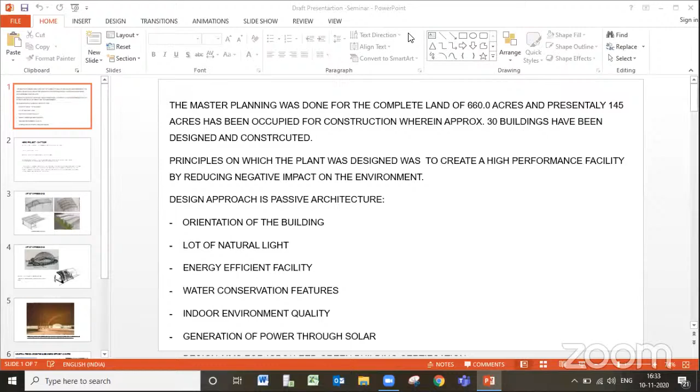Good afternoon to everyone. Are you able to hear me? Yes, Mr. Dwivedi, good afternoon. Should I start? Yes, please. Are you able to see my screen? Not yet. My screen is visible or? No, sir. No. Okay. Screen. 1 minute. Yeah. It is visible now? Yeah, it's visible now, sir. Okay. Thank you.

Good afternoon to everyone again. I am R.S. Dwivedi from PC Design. They have already introduced me. We have designed the project for Hero Motocorp Limited at Chittoor in Andhra Pradesh.

The master planning was done for the complete land of 660 acres. They are having 660 acre land, and presently they have occupied 145 acres in which various buildings have been designed. The main buildings are the assembly plant, the paint shop, the frame assembly hall building, and the dispatch area. These are the bigger buildings.

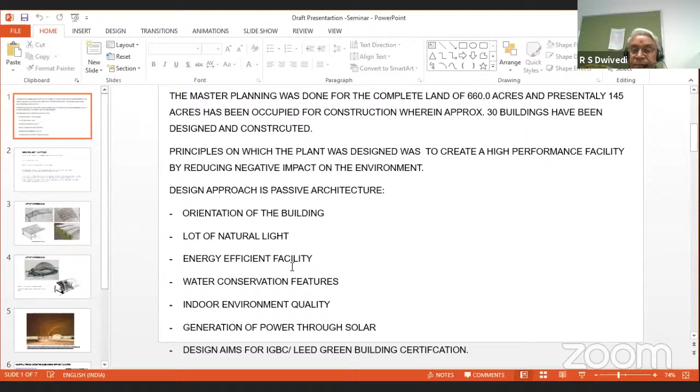The key feature is it is a PEB building. The building is designed in two heights. Each bay of 15 meters has a 10 meter height, and another 15 meter bay has a 12 meter height. We have provided north light glazing to get natural light from the north side. Glazing is provided on both sides. I'm sharing a small sketch for that — this kind of assembly plant is there.

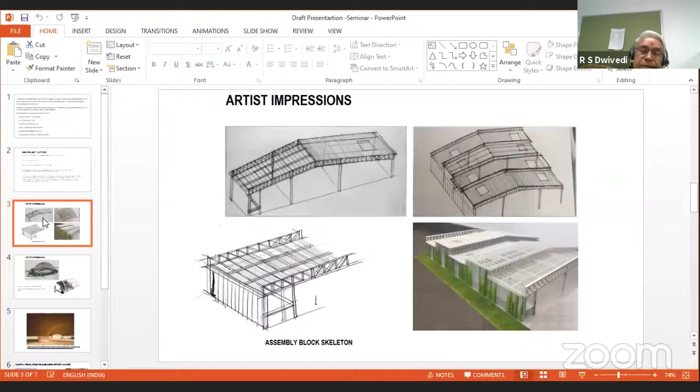The orientation provides sufficient natural light to the interior space, so there's no requirement of switching on lights in daytime. The structure is planned with a grid, both low bay and high bay, as I have explained. It was basically planned to install glass on the high bay north side for natural light, and solar film on the south side.

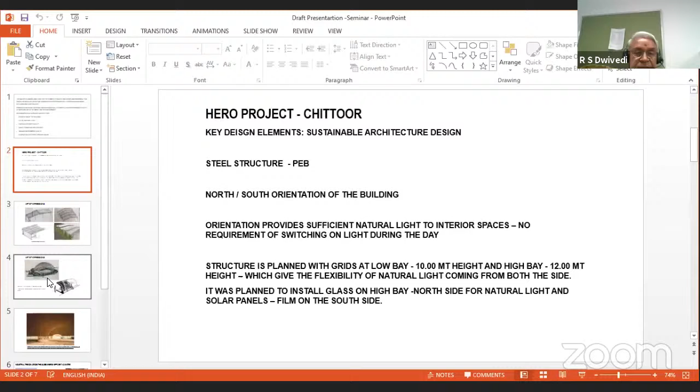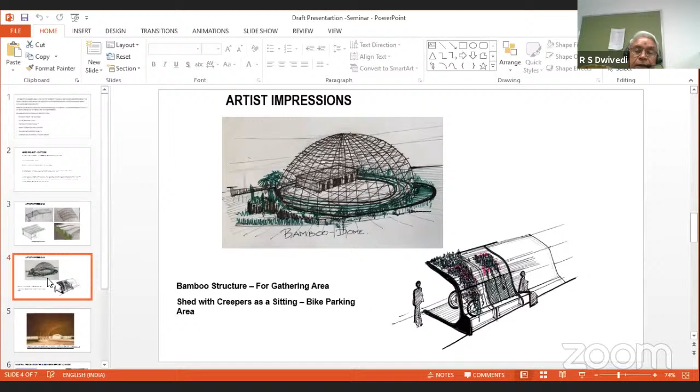We have planned a bamboo structure. It's a bamboo dome having 25-meter height. It was created just for get-togethers and for any large convention, public training purpose. The structure will be like this.

Presently, it is not completed, but it will look like this. The plant will be totally air conditioned. We will be installing it, but presently it is not installed. It is planned and it is in the design scheme. There will be Big Foot units. The unit is basically shown like this. It will appear like this in the photograph.

It is a ductless air conditioning system for large footprints. There won't be any ducting, I will show you again. You see, maybe see the cursor. Only a chute will be inside the plant. There won't be any ducting. It will blast the air.

Moreover, this size of plant is 467 meter by 72 meter. There we have planned 4 units for this much size in the assembly unit.

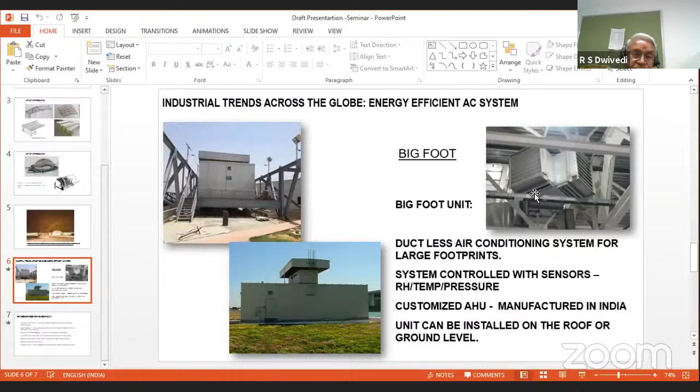Apart from the Big Foot unit, we have planned the baffle walls for acoustic purpose. There are visual protection films in the display area in the office building. Indoor greenery we have planned in terms of green wall, outside also, inside also. Grass screen pavers are provided in the parking area to create the environmental paving system.

We have done the road, bituminous road with the waste plastic, keeping in mind the environment and green building system.

Basically, in any architecture, we always feel that we should use the best material in the project, which gives us more of the design and aesthetic flexibility. We have used the metal sheeting of maybe Tata BlueScope. It's a Colorbond roofs and walls sheeting.

We are using the Tata BlueScope sheet in our various buildings also. It is used in conventional steel buildings, and it is used in PEB buildings also. In various warehouses, it is in the design also, and it is in execution also.

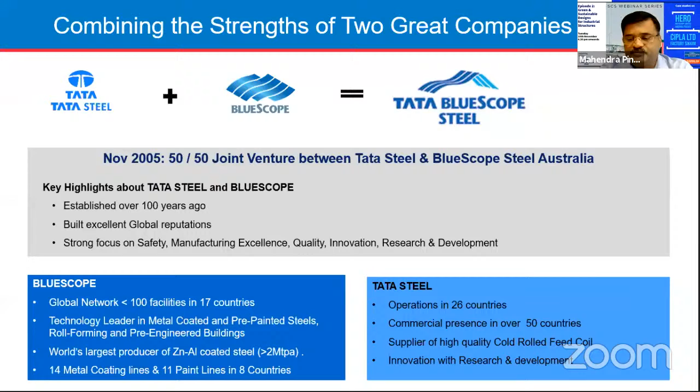And development. Now they are talking about sustainability for the buildings. As you know, steel has been used mostly in engineering and construction as a material because it is very strong, durable, flexible, reusable, and most easily a recyclable material.

If you see, the steel recovery rate from construction is around 85%. And if we are doing the recycling, then you can save millions of tons of carbon dioxide. So this is about the life cycle segmentation I'm talking about, because of the steel's durability and recyclability.

So it goes to the construction phase. If you can fabricate, or do prefabrication or PEB manufacturing, which helps reduce the lead time and whatever construction nuisance normally happens at the construction site because of fabrications, weldings, cuttings, and all these things.

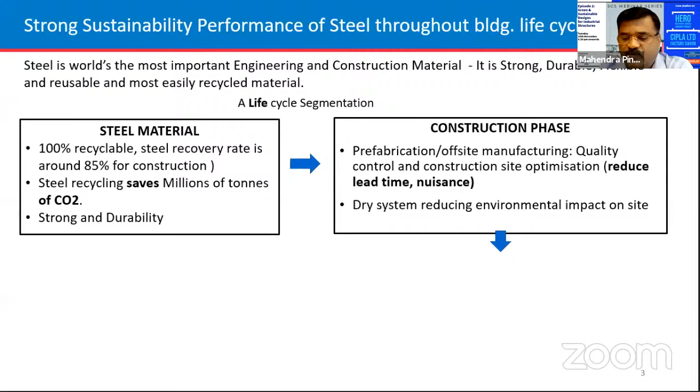This is not required nowadays because PEB buildings have been designed and fabricated at the factory and shipped as, we can say, a full kit solution to the site where it can be assembled and ready to use. So it's mostly a dry system construction and it is fully environmental friendly. We are not using natural resources when we are building the factory.

So in case of designing or the life cycle of buildings, the weight reduction of structure is normally very important, where we can save steel wherever there is a requirement of loads, where you can design with the steel structure. Steel has excellent longer spanning capability.

So you can have the columnless structure. Sometimes we can span, say, 100-meter spans wherever required, because airports and aircraft hangars require a clear span of 100 meters plus. Steel is the only solution for that.

So if you want to have extension of the buildings, extension is possible in case of PEB buildings or any conventional steel buildings without disturbing anything, and it can be built very fast.

If we're talking about organic color coated steel, there's a pre-painted steel. Nowadays, the paint system is developed, which gives more reflectivity, so you can get more comfort inside the building for who is working under the roof.

So that talks about sustainability. And if you talk about end of life, you can dismantle it, reuse it, or recycle it again. That's the benefit of steel. The overall life cycle cost of steel is very low compared to RCC structures or other non-conventional structure types.

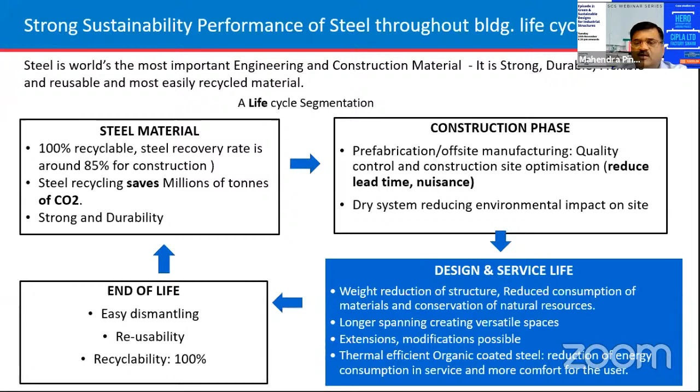Nowadays architects want to build nice, sustainable architectural buildings, so the steel has to take that type of structure and shape. So we manufacture the color coated steel, that is Colorbond steel.

And when it's going for various further operations, whenever there is cutting, bending, crimping, or any type of shaping like roll forming, the paint film should not crack. So it gives stability and perfectness for your structures.

We have a range of colors, so you can choose any color. Again, it gives thermally efficient buildings. So it's the best choice for architects to use color coated steel for building applications.

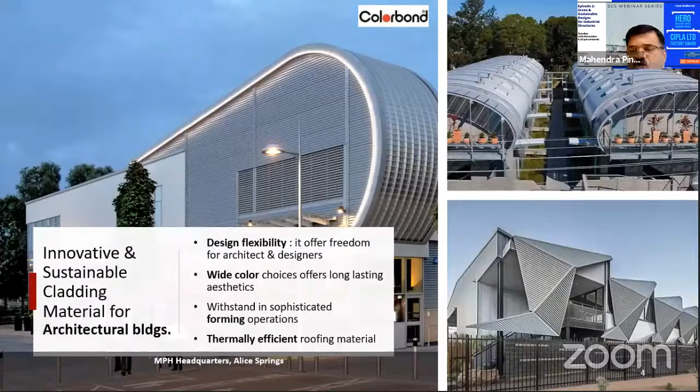These are some photographs built in Australia. I'm sharing this with you because the architecture is very nicely done for institutional buildings or shopping malls type of things. It's not limited to small buildings, it also goes for large industries.

So industries should consider extreme weather conditions. The material should withstand extreme weather conditions.

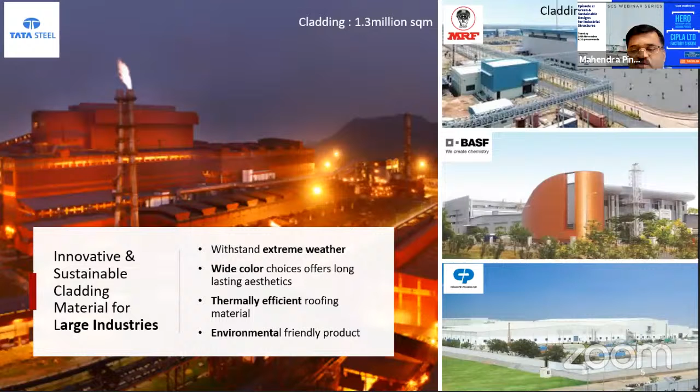Or very close to the coast, or in extreme weather, the steel has to withstand, and Colorbond steel is an option for that. It's also used in logistics parks where the structure is built with curved structures or double slope structures with various combinations and logo properties.

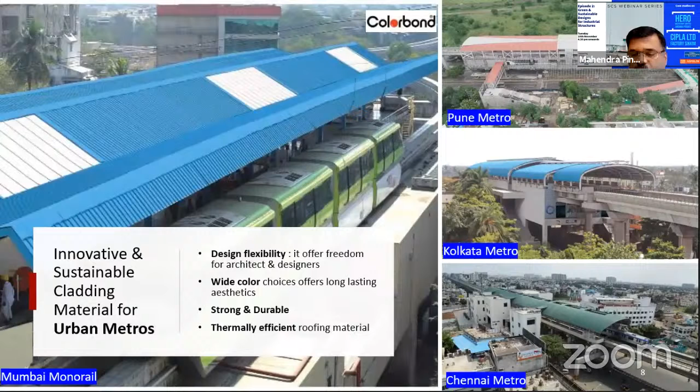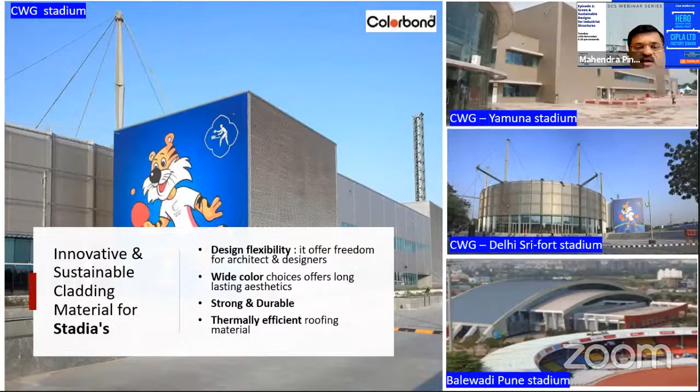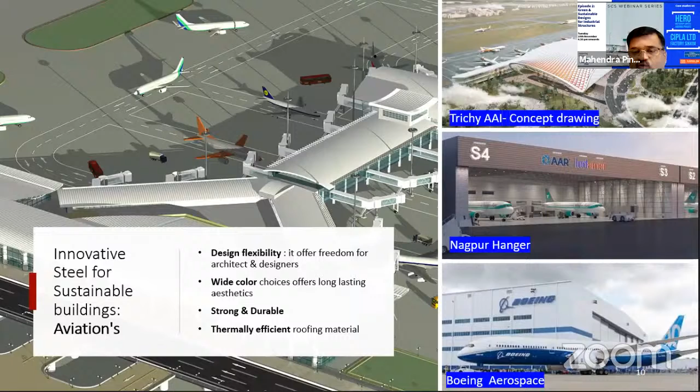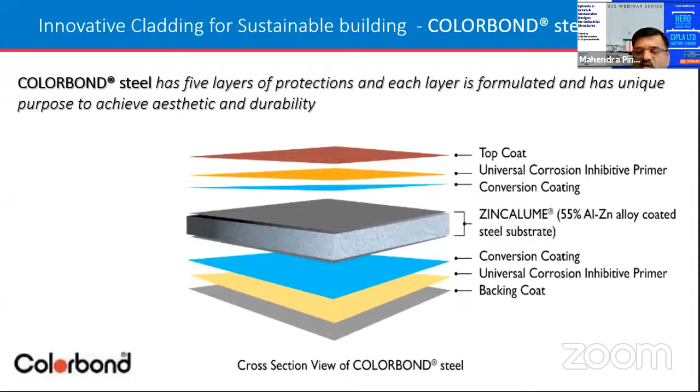So what goes behind making Colorbond steel? Colorbond steel has a zinc-aluminum coated steel as a substrate, and it has been made at the factory, with 5 layers of protection, which gives durability, aesthetic quality, and sustainability for the buildings throughout the life of the building structure.

So the manufacturing process of ours is again sustainable. Whatever we manufacture at the factory, the surface treatment sections, solvent emissions, absence of harmful substances in the paint system - we are complying to that. And that's why we got the accreditation of ISO 14001 for environmental management system standard.

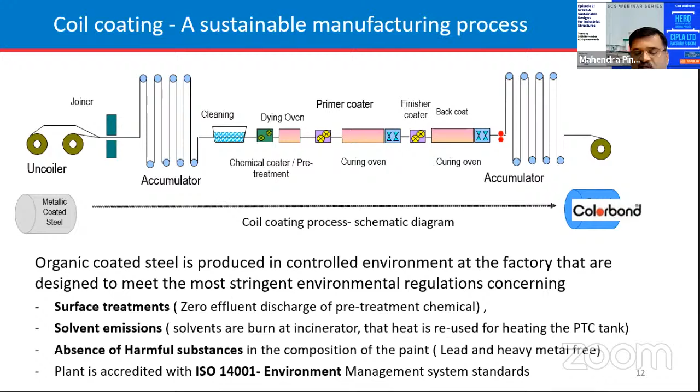So this sustainability is also extended to the manufacturing process as well as site fabrications. What are the ranges? We offer different types of products - Colorbond steel, XRW steel for general applications where there are no harmful gases, or factories located at type 3, type C1, C2, or C3 type of environment.

And Colorbond steel has Thermatech technology, which gives more reflectivity. With Thermatech technology, you've heard the name SRI value. Nowadays green building talks about higher SRI value products for cladding material. So Colorbond steel has an SRI value of more than 78 for some lighter colors.

Also, if you go with an SRI value of say 30 or 40, the building slope has to be designed in such a way that it has to be more than 10 degree slope. Lower than 10 degree slope, then you have to use a higher SRI value product.

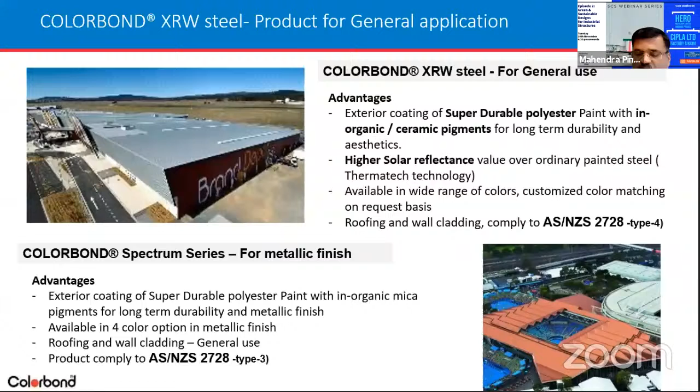So somebody is looking for a metallic finish - we also offer that for buildings, where you can get a metallic luster. In the morning you will see different colors, and at sunset you will see a different color. On any particular day, the building is going to give a different look altogether, and it is complying with type 3, type 4 categories as per ISO standard or Australian standard.

It's not limited to that - if somebody is looking for projects very near to the coast, say 100 meters, or within heavy industrial areas, where within 5 meters or 2 meters distance there is another factory emitting chemical fumes, gaseous vapors - even if the building you are making for an assembly unit is not emitting any fumes during manufacturing, nearby companies might be. So your roof has to withstand that type of atmospheric condition.

So Colorbond Ultra is the product which gives more life - I would say it's 1.5 times more than Colorbond XRW, and it's going to give more life for your building, which is located near the coast or in an industrial environment.

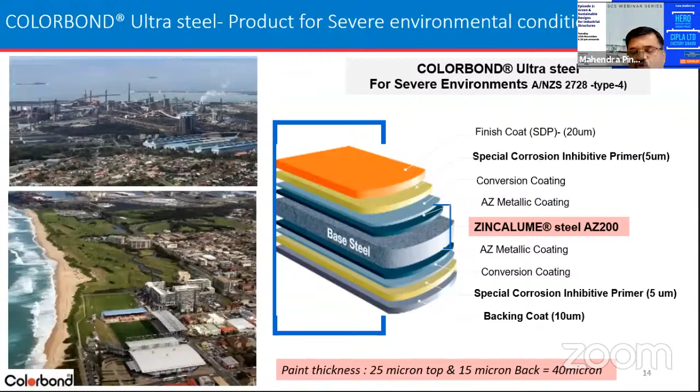So what is the assurance? If somebody asks, are you justifying that this is going to perform? We are not limiting to accelerated lab tests - we also go for real life outdoor tests to assure the quality of product, because we are offering the product, but what is going to happen in 10 years? So we are assuring 10 years performance or 20 years performance based on our experience, because this product has been tested and proven for more than about 60 years now. So we know that - so what does the test normally do?

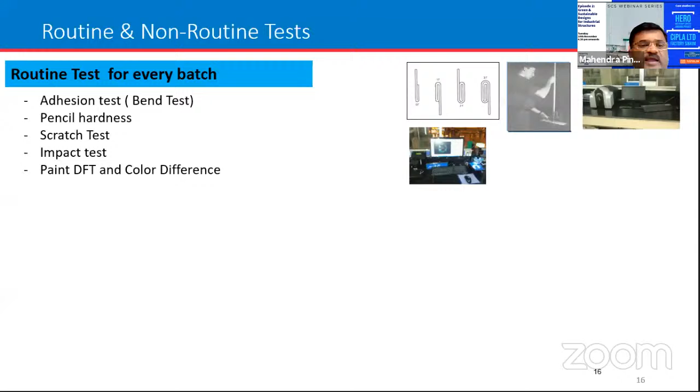The routine test, where normally the product is going to have further operation like bending or curving. We measure that bend test, or there is pencil hardness, the scratch test, impact test, or if somebody is doing hammering, what is going to happen on the color coated steel. And we also measure whether the paint DFT is right or not, what is the color, whether you are asking for something and where I'm supplying something, it has to match without differentiating to the naked eye. So that is what color difference is being measured.

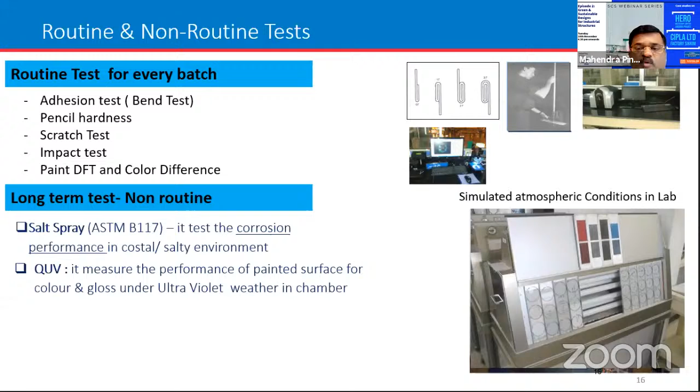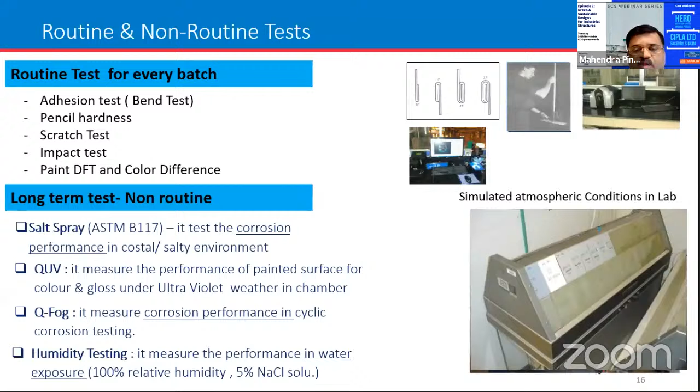Then long-term tests, which are laboratory simulated tests: the salt spray test, QUV test, where ultraviolet rays are measured to see what is going to perform under ultraviolet rays. A Q-fog test, which is a cyclic test, where cyclic corrosion is simulated because we are replicating the condition in coastal or industrial zones, and humidity where factories are located in Mumbai or similar coastal, humid regions. So we are measuring the performance of the product, and it's not limited to that.

There's also the outdoor exposure test. BlueScope Steel is doing the test, and we are also doing it in India. We have done the test for outdoor exposure at various locations, and we have 2 sites currently operational. So if the factory is very close to the coast, we treat it as a C4 type of category, and we measure the performance.

We create the formulations, we keep the samples for whatever new product we want to introduce, or what is the performance of the competitors, what is the performance of our material, what colors we are going to introduce in the near future, what different innovations we are going to do. Everything is done there. It's just like a laboratory, our outdoor exposure laboratory.

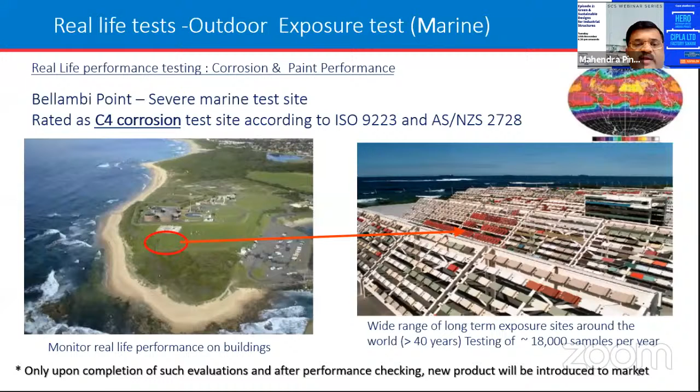So if I want to introduce a new product, we do the test prior to that, say 5 years prior to the product launch, and we keep 15 to 20 formulations, and then we select which formulation is going to withstand 5 years of exposure. Based on that, the product is introduced and then supplied. We are not just mixing one pigment or resin and supplying and delivering that. That is not our aim.

So this is a tested and proven product, which is why we are assuring the performance of the product. It's not limited to the coastal region. How is the product behaving under ultraviolet rays, or a combination of marine, ultraviolet or industrial conditions? We measure all the performance in different sites, and we check - these are 2 examples: the original color of orange changed to yellow, or blue changed to white.

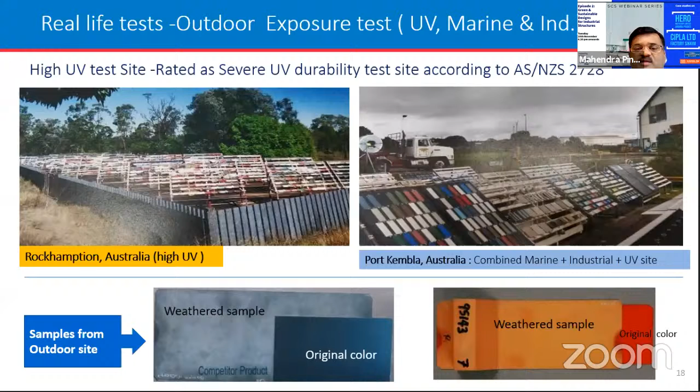These are the performance issues when inferior paint has been used, and the product is going to show this only after 3 to 4 years, not immediately. So if you are building something beautiful, we need to be assured that the product is going to withstand, not limited to 3 to 4 years. It has to perform through the life cycle of the building without maintenance.

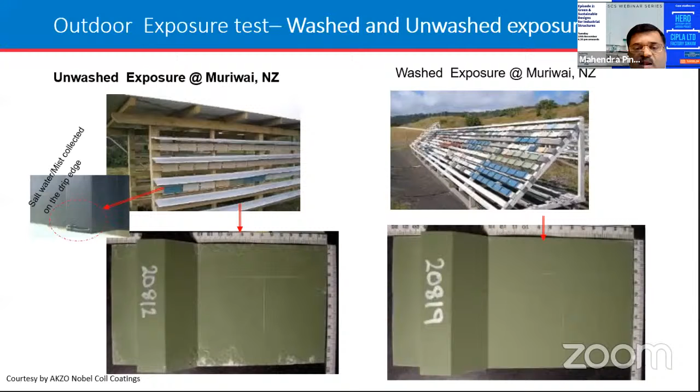So if you talk about cleaning, a roof sheet is always being cleaned by rainwater. Those areas which are unwashed are where corrosion happens more quickly. So the roof product is going to give more life, but the product under the eave, an unwashed area, there will be more chances of corrosion compared to the roof. That's why we have to have regular cleaning or maintenance, so that the building is going to last longer.

So what type of formulations do we talk about? I'm just going to go into a little detail about the paint system, where most consultants and architects are ignoring the fact, or not going into detail. They are treating every color-coated steel as equal. But you need to see what product you are going to select, use, and recommend for your projects. So that's why this small information is important.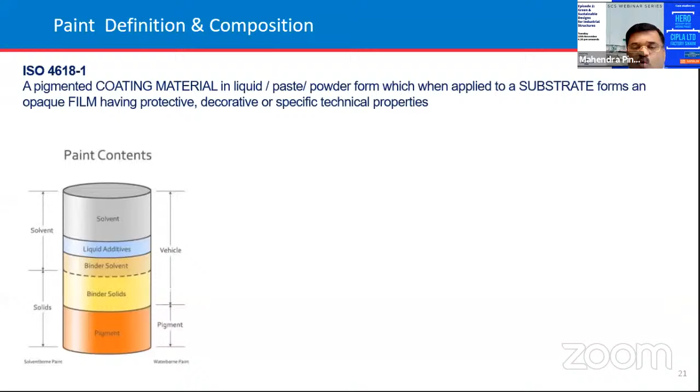Paint is made up of pigments, resins, and additives. These are the important things. Solvent is used for the application method. So resin is a very, very important part of it. It is the backbone of paint. It improves the physical properties and characteristics of the paint.

And there are different types of resins: epoxy, alkyd, polyester, PVDF, plastisols, RMP, SMP falls under the polyester family. But it is about 35% of this.

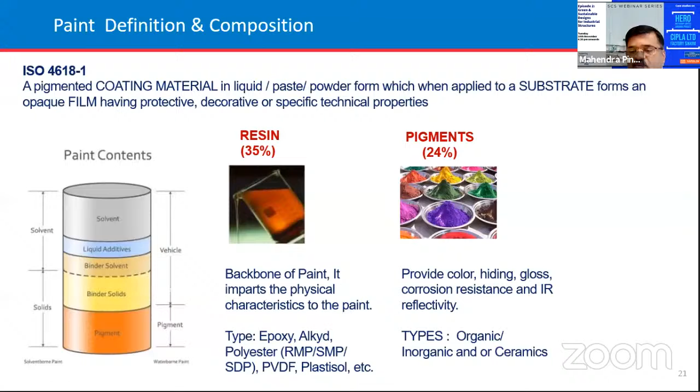Then pigments, which give the color for your object or the steel, and improve the hiding. You are not going to see the metallic surface because you are hiding the surface by using the pigments. And the gloss, corrosion protection - pigments also provide corrosion protection, and also provide heat reflectivity. Infrared reflectance property is very good in some of the pigments, which we can talk about in detail.

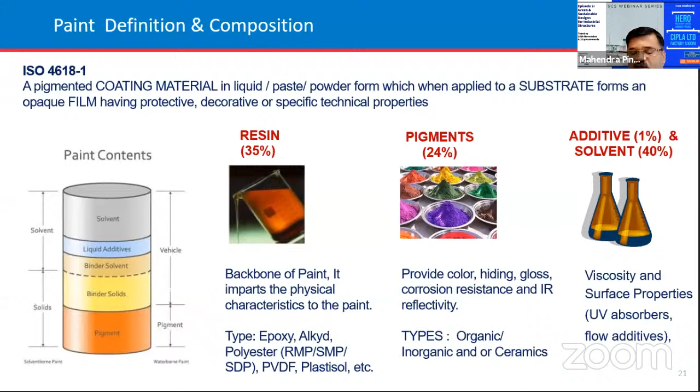And the additives, like UV additives - using only 1% of the additive, but it is giving durable long-term performance. And the solvent area, it's about that - it's for application method.

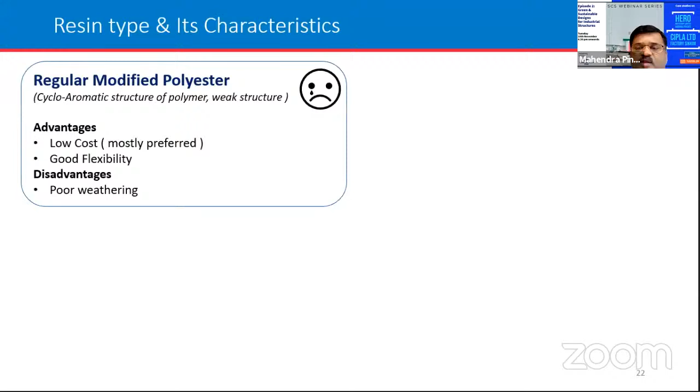So what is the resin? Just regular modified resins, polyester, which is a family of RMP. It's a very low cost product, and most companies prefer to use that low cost product. But if you see the weathering performance of this RMP product, it is very, very low - poor weathering. The RMP is mostly preferred for interior applications like appliances, washing machines, refrigerators, where it is not going to be exposed to UV light. So that's why RMP is preferred over there.

Silicon modified polyester is an advanced version of RMP. It has a cycloaromatic structure, having 30 to 50% of silicon content. If the silicon content is less than 30%, then we can't call it silicon modified polyester. Mostly 5% content of silicon is used in the SMPs, which is exactly the same as the RMP product.

Because it is a hydrolytically unstable product, when there is rain or continuous wetness, the SMP is going to fail over there. And it has poor flexibility, because the silicon content in the paint gives a film that gets harder. So it's not a good paint system, and it has been very old.

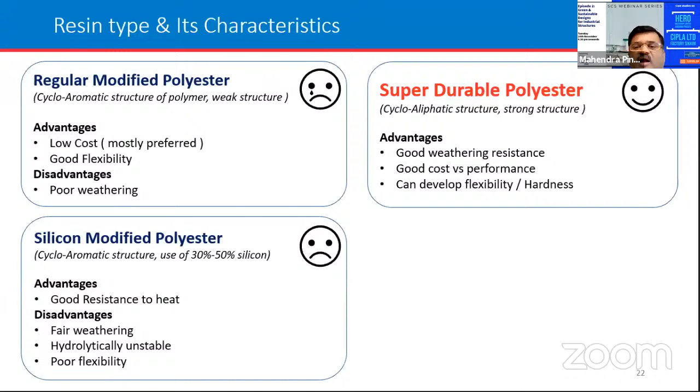Nowadays, it's a super durable polyester. The polyester paint system is improved further and further, and that's why I call it super durable. Durability is improved with good weathering resistance, and it's very good for flexibility. Whatever the drawbacks in RMP and SMP, it is an improved version - super durable - and it is cost effective compared to that.

If you compare with PVDF - it has excellent flexibility and outstanding weathering resistance, but it is very expensive, and it is not affordable to the factories. If you are building a very big factory, PVDF cannot be affordable. But the benefit is the weathering performance is good.

But if you are going for weathering performance like color fading and chalking, you are ignoring the corrosion resistant performance. The corrosion performance of the PVDF paint system compared to super durable polyester is low, because it has creepage issues and all these things - the paint film is coming out just like that.

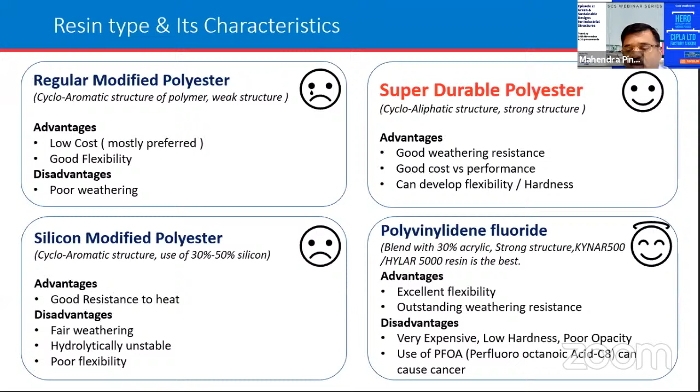And some people are using low grade PVDF, which has carcinogenic content. So if you want to go for PVDF for architectural or landmark projects for color performance, I would recommend going for Kynar or Hylar type products, which have 70% PVDF and 30% acrylic - a very, very strong carbon fluoride bond, which is good for that, but not for the corrosion performance point of view.

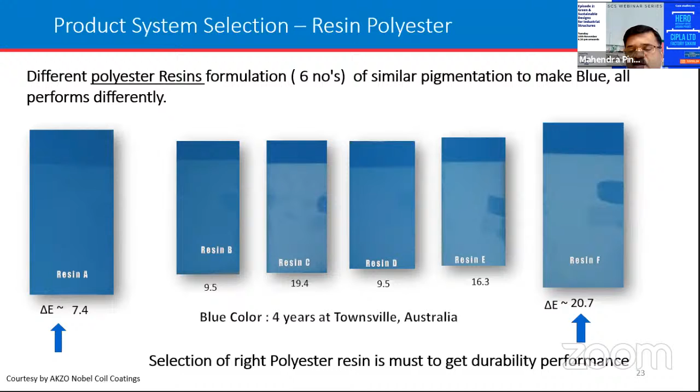In case of pigments, there are three types normally. Organic pigments have very low cost effectiveness - I'd say higher tint and bright colors. So if you're talking about clean, bright colors, paint using only organic pigments is more susceptible to color fading. Within 2 to 3 years of UV exposure, it is going to fade. It also has poor resistance to heat and chemicals, and poor heat reflectivity.

But to overcome these problems, there are inorganic pigments, which occur naturally, do not damage the environment, are sustainable, and have an earthy look.

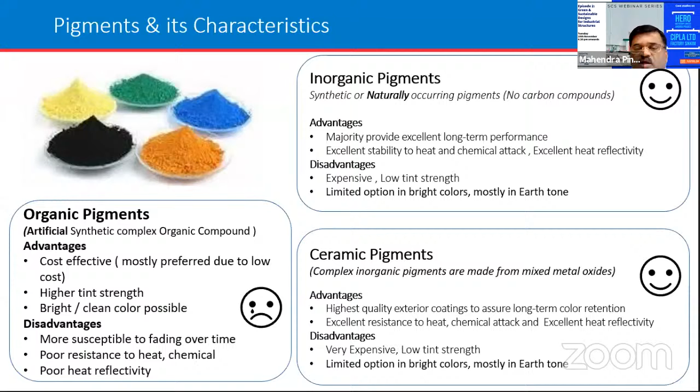Same thing with the ceramics, which is metal oxides, it is made at 1200 degrees centigrade. So these two, inorganic and ceramic pigments, are the pigments which give long-term color performance, but it is costly. You have to pay for that if you're looking for really good aesthetics for your building.

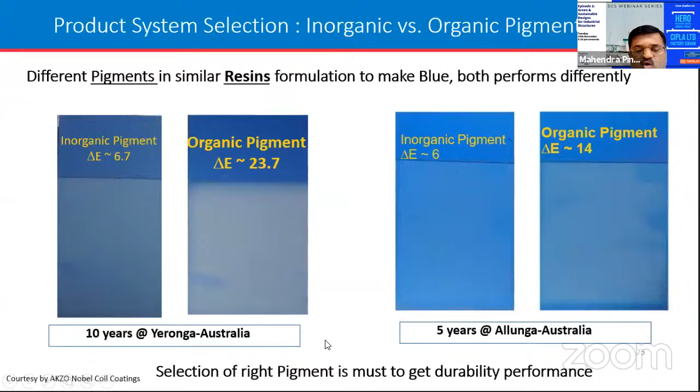So these are different pigments with resin systems. Organic pigments, delta is 23. Inorganic pigments using 6.7. You can see the difference. So selection of the right pigment is a must to get the durability of it.

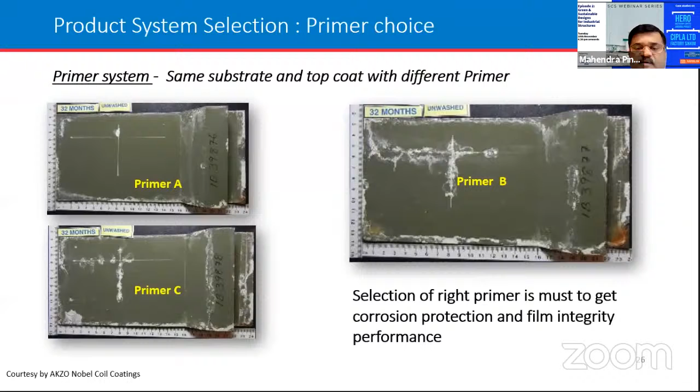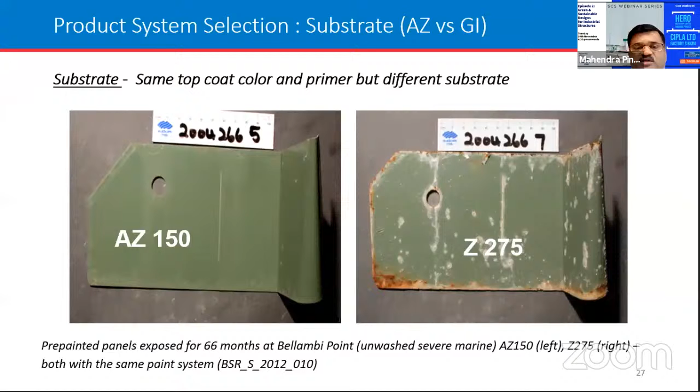Similarly, the primer is also an important part of it because it is in between the substrate and the top coat. If it is compatible with both, it is going to perform long term. And we shouldn't ignore that zinc-aluminium coated steel as a substrate is excellent over galvanized substrate. Everyone knows about that nowadays, it's used for these applications.

So for performance measurement, if you're building a factory, you have to see whether this color coated steel is going to retain its color for a long time, whether it is not going to chalk, and whether the film integrity is good, meaning there won't be any paint film peeling. So the important thing is the quality coating system.

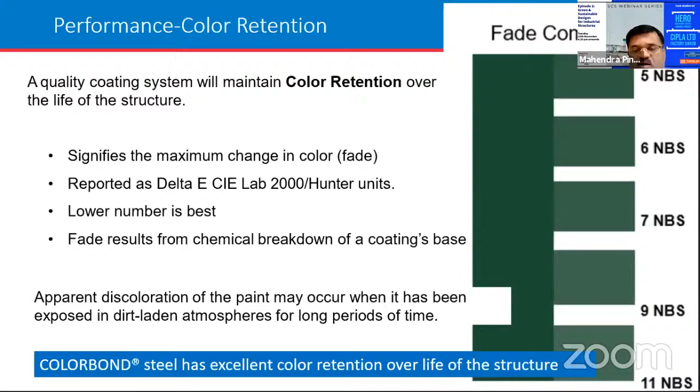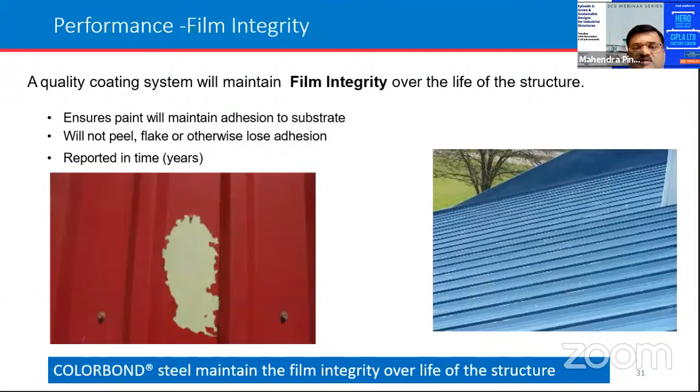Same thing with chalking resistance, it is excellent in case of COLORBOND steel, it doesn't have chalking, and that's why it performs for a long time. Similarly, film integrity, we don't see these types of problems in COLORBOND steel because film integrity of the product is excellent. There won't be any intercoat adhesion issues in all our products manufactured in our Jamshedpur factory. So always check for the product.

People normally go for, if somebody is giving a warranty, then the document alone is sufficient and we say okay, 10 years, 20 years. We look only for 10 years or 20 years, but what is the parameter being mentioned that we need to focus on? If you are not focusing, then people try to give only RMP coated, organic pigment, low cost products for premium building applications. So my request is, don't ignore that fact.

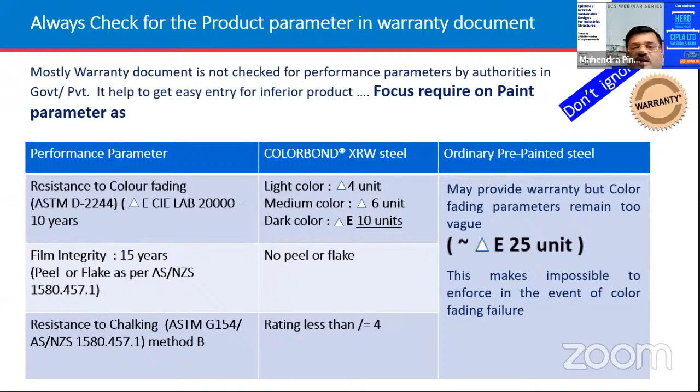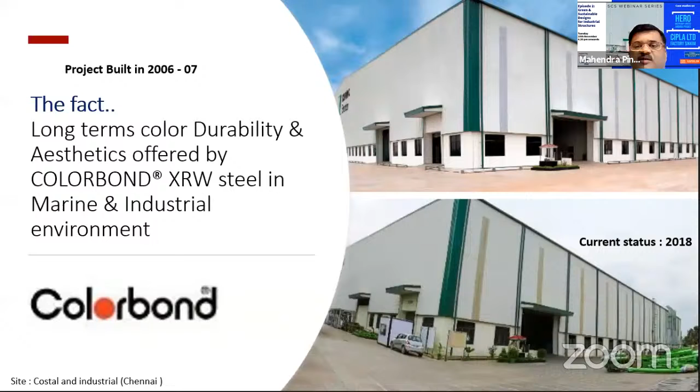So these are the very important parameters which we need to look into, what is the performance over a period of time. These are the actual facts, 12 years of exposure of our COLORBOND steel in Chennai locations. It's excellent, low fading.

And if you go for a product which is designed by an architect excellently, but the product over a period of time is not performing, where is the architectural look going, where is the sustainability, it is damaging the environment and all these things. So at the end of this, I would say combining the advanced coating technology with a high quality paint system gives the guarantee on aesthetics and durability.

So COLORBOND steel withstands all the extreme conditions. It doesn't have the hexavalent chromium compound in exterior coatings, it doesn't have heavy metals, and it is free from lead content. And having the Thermatech technology, you are going to live comfortably inside the buildings, and the product comes with warranties so you can have peace of mind, no need to do maintenance again and again. It is also a green certified product by IGBC.

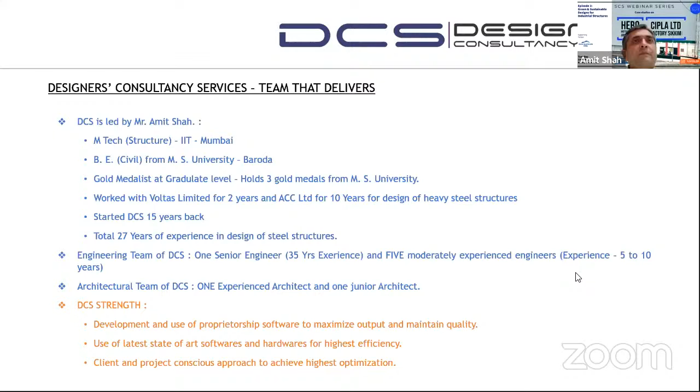We recently did a factory for Britannia Limited at Mundra, and designed a factory for BIC Pens, the European giant in pen manufacturing, who have a joint venture with Cello Pens, with their factory in Vapi designed by us. We have designed aircraft hangars for military engineering services at Santa Cruz Airport, at Karwar, at Colaba, Goa, and many more. We have also been designing warehousing complexes for almost all major warehousing companies, including Indospace.

We have designed a media pavilion for Rajkot Cricket Stadium at Rajkot, a state-of-art clubhouse at Valsad for Mangalyam Meadows, and Reliance retail malls in Bhubaneswar. There are many more projects, and I can share my details if anybody is interested. We can discuss those things later.

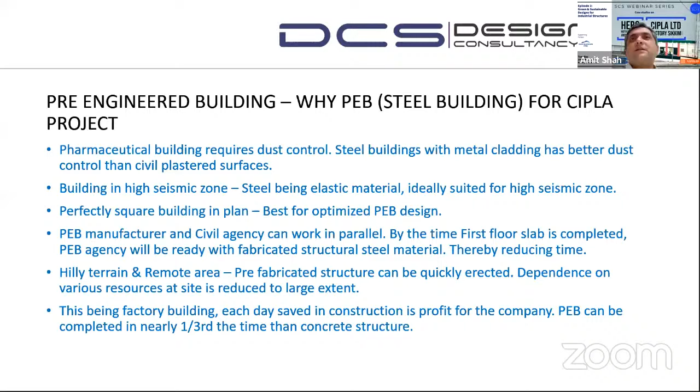I'll give you a brief of the project. This is one of the slides. The building was a G+3 story building with basement, ground, and first floor in RCC—you can see that in the photo. The building had very heavy loading because of the equipment and manufacturing facilities inside, and required very large unsupported spans, about 18 meters, with loads as high as 2 tons per meter square.

Each floor plate was about 1 lakh square feet. As I told you, it was almost square in plan, approximately 100 meters by 100 meters. Total steel we designed was approximately 5,000 metric tons, and the entire 5,000 metric tons was manufactured in the plant and shipped to the site.

This was one of the major challenges we faced, and a major highlight, as I told you, was that the structure is designed in a very high seismic zone. We had limitations of transportation—you cannot transport a piece longer than 6 meters. So even the column requires joints at regular intervals; no piece can be longer than 6 meters.

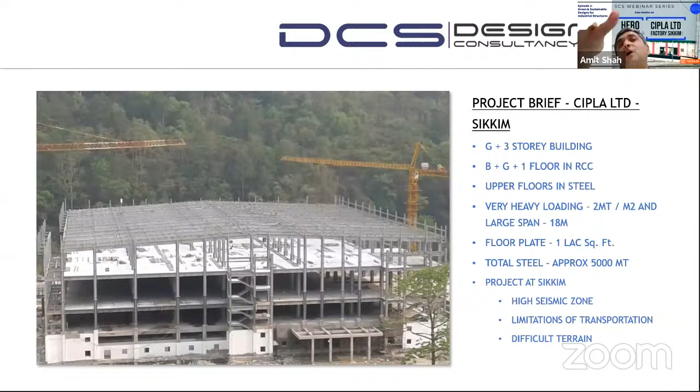It's very difficult terrain to work in—completely hilly terrain. The level difference between two points at the front and back side was as high as 14 meters. So therefore we had a part basement, then ground floor, and then first floor. These were the highlights of the project.

In this project, as Mr. Pingle was pointing out, we have used PVDF coated panels, and these are all sandwich panels with PIR insulation material inside, which is fire retardant. The PVDF panel gives an excellent look from outside. I'll share some more pictures as we progress on this presentation.

The mother coil of all this steel was manufactured by Tata Steel, and believe me, today the building looks the same—there is no change at all. It's almost 3 years since we installed this material, and there's no change. So PVDF has given very good performance to us on this.

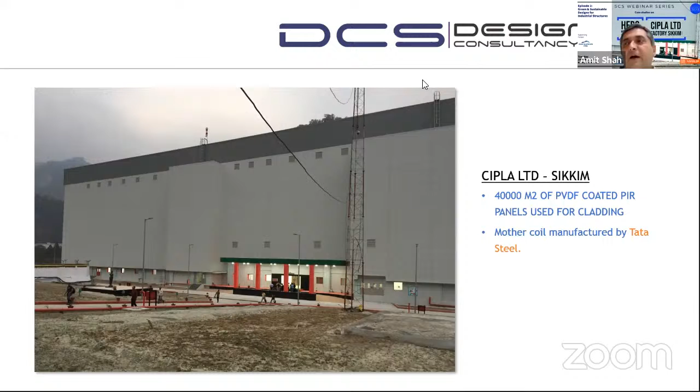I'll take you to some more details on this—the engineering challenges we faced while designing the project. The major challenge was that the structure was so complicated, with so many columns, beams and levels running inside, that it used to take about 48 minutes to run the STAAD file once. For any optimization of such a level of structure, you need maybe hundreds of such iterations. So design time was really a challenge. How do we reduce that? How do we expedite the design of each and every element? That was the biggest challenge.

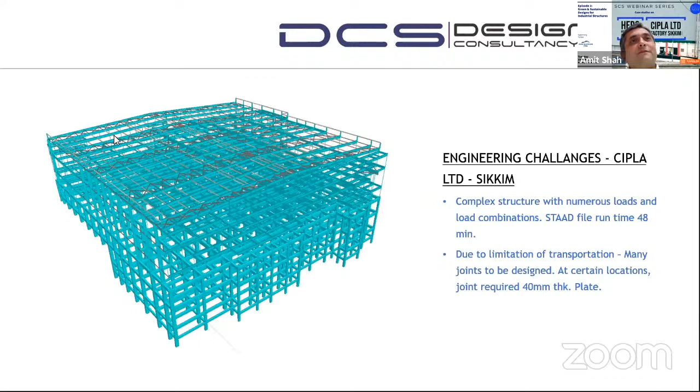I have shared a 3D model of that. You can see how complicated it was.

Number two, due to the transportation limitations I mentioned, every 6 meters you have to have a joint, and each joint has different forces. We needed to design each of those connections—there were thousands of them. At some given times, 3 or 4 engineers in my office were only designing connections for the project. So that's the level of engineering that went into it.

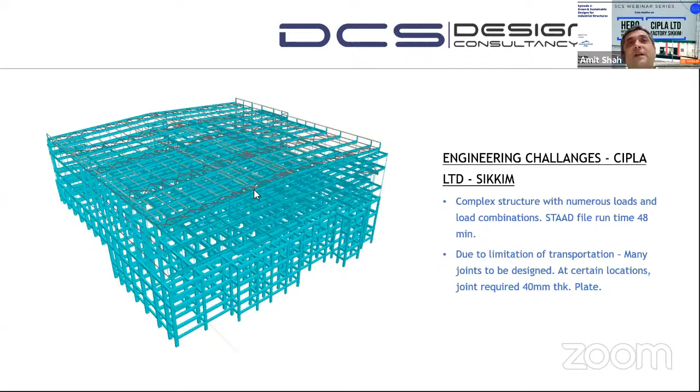Second was very heavy loading, and because the loading is very heavy, each joint becomes heavy. Third, the requirement we put was, since this is a pharmaceutical plant, we would like to have the entire structure repainted after erection is completed, so that it remains clean.

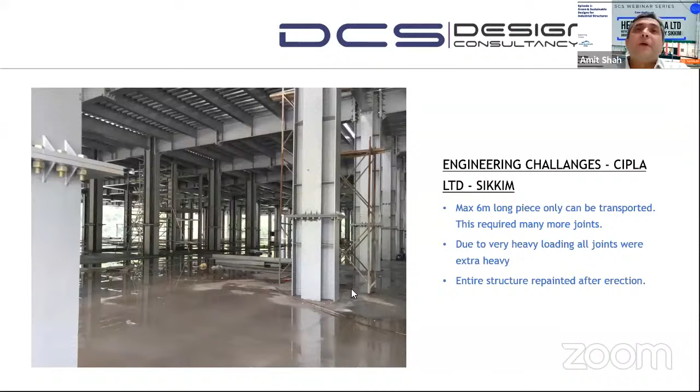We do not have a lot of dust stick to that. That was also a big challenge. It's a huge amount of work to repaint the entire structure.

You can see this from the outside, from one side. As I told you, the floor plate was 100 meter by 100 meter. Now you cannot take a crane inside, so how do you do erection of such heavy pieces? We had to have long tower cranes, with boom length of 60 meters, and 2 such tower cranes were deployed at site so that we could do erection from outside. We cannot put a crane inside, because if you put it inside, the erection work is delayed that much. So we kept tower cranes outside and did these erections.

Another challenge we had is, in one part of the building, they installed ASRS, Automated Storage and Retrieval System. It's a kind of vertical warehouse. The height of the ASRS system was about 20 to 21 meters, and it requires clear height, so we needed to install long columns. These columns which you see on the outer face were unsupported, straight for about 18 meters, with a small part of concrete column below. That was another challenge, to install such tall columns without any problems in that area.

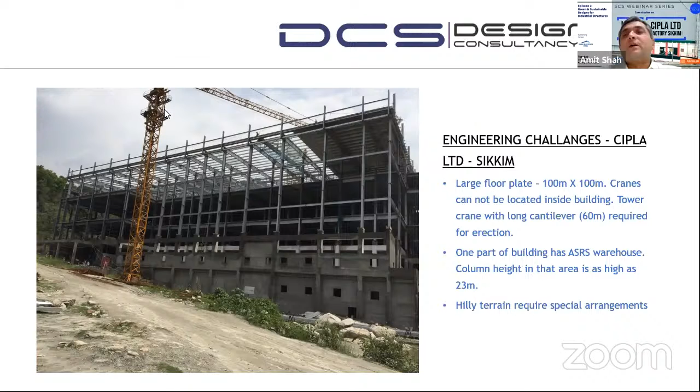Apart from those large pipe rack structures, we also had to install walkable false ceilings in the entire area. Walkable false ceiling is required for services and for maintenance of services. Further load on walkable false ceilings also adds to the load which we already have.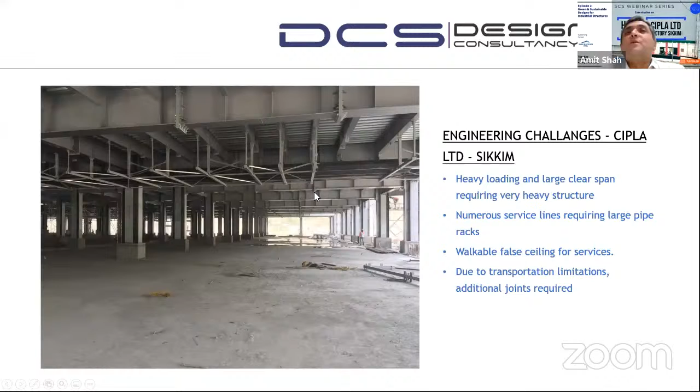We have also used an insulated roof here. This is a standing seam profile, and we designed the roof for solar panels to give more sustainability to the building, because these are pharmaceutical buildings. It requires temperature control inside the building. Manufacturing requires very accurate temperature control inside, which requires high-end air conditioning, and those air conditionings are fairly expensive. So we made the building so temperature tight that we can have temperature control inside without spending much money on it. So the roof was standing seam profile with solar panels installed, which will also give additional electricity.

The sides were, as I told you earlier, PVDF coated steel outside, a normal color coded galvalume inside, and 100 thick PIR panels in that. This has reduced electric consumption, as I was told by CIPLA executives during the project execution.

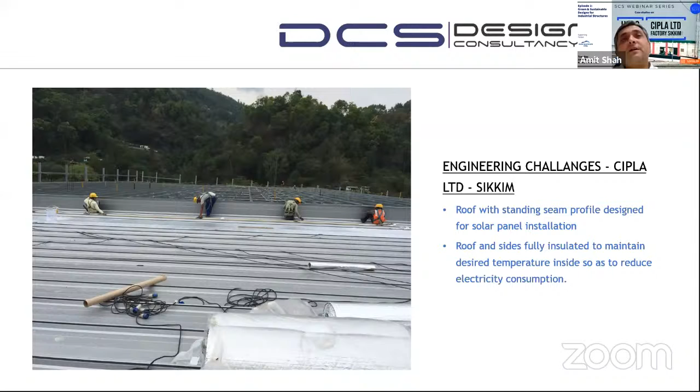One more challenge which I told you about is the ASRS area. You can see in this photograph, the ASRS requires clear height. This clear height, total height from bottom to top, was 23 meters clear. They need that clear height, and then you need to have those columns which are also on concrete. You can see at first floor level, till first floor level, we have concrete, and then we go with steel. So this engineering was challenging.

We did that. If it interests you, I can quickly show you how the ASRS functions, for those who have not seen this probably. I'll quickly take you through this. It's a state-of-art storage facility inside.

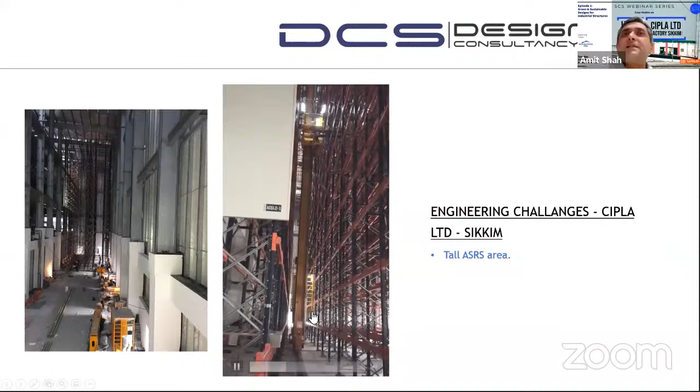There is no manual involvement in picking up material from the storage systems. This is completely automated. You can see here, the lift will automatically pick up a rack from the entire racking system, bring the pickup material back, go to another location from where you want something more, pick that up, and then come back.

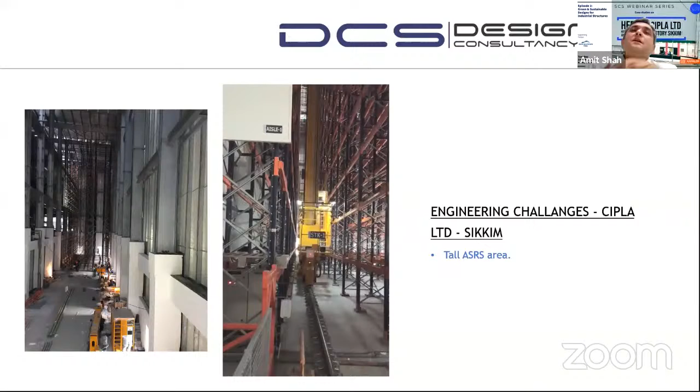Right, so it is picked up from both the locations, and it will come back. You have product available, so manpower involvement is highly reduced, plus it's a very safe storage solution, you can say.

Right, this was a very interesting design experience that we had for installation of these racking systems, which are extremely tall racks.

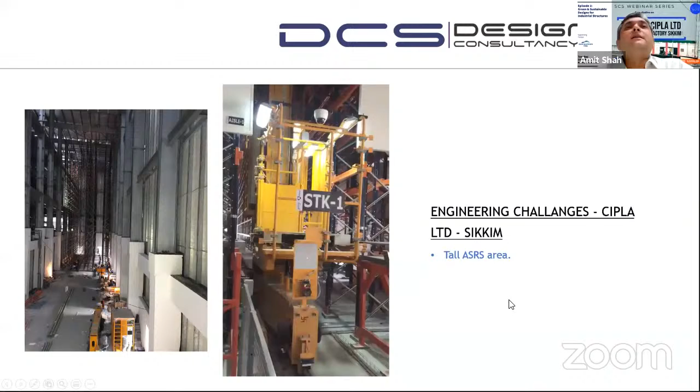Next, you can see this photograph, which I wanted to show you, performance of color-coded sheets, the PVDF coated color-coded sheets. They are superb, you don't even see those corrugations. They are micro corrugations, and because the sheet is so strong, it's 100 thick with insulation inside, so there's no question of getting any dents or bends.

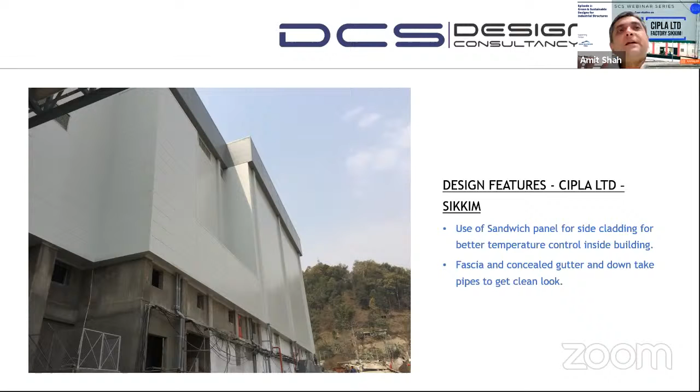Plus, we have concealed downtake pipes, we have concealed gutters, and we have given a separate fascia, so even roof slopes are not visible. It gives you an absolutely neat and clean view from outside.

Some of the sustainability features which we have built into this project include provision and installation of solar panels on roof. Number two, as I told you, we have used steel structure in this highly sensitive seismic zone.

Because steel is used, there is no question of crack development and refilling of cracks. If you have to refill cracks, it requires plant shutdown and plant recertification to restart the plant, which takes a lot of time. So because we have used steel building, we are out of this entire thing.

As I told you earlier, Sikkim has almost constant temperature throughout the year. The temperature variation is not as large as you see in Nagpur or in North India, Delhi and all. That is one advantage which we used for...

Cipla's sake, we have also done good insulation of the building. So maintaining temperature inside the building was not a big challenge because of insulation and the constant outside temperature, which gave a lot of power saving, electricity bill saving.

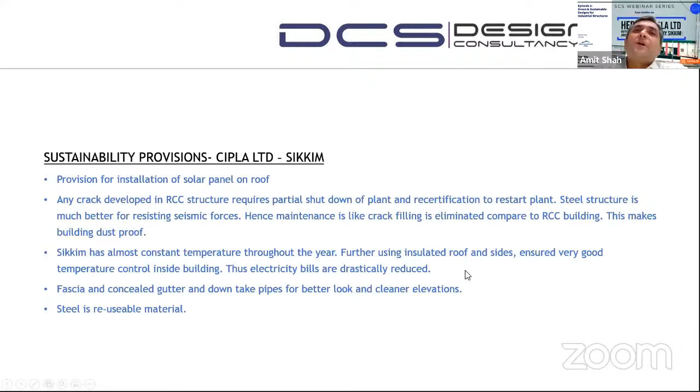As I have shown you, fascias, gutters, all are concealed, giving a very clean look from outside. And most importantly, we have used steel as a material of construction, which is reusable. So for all those who are looking to get green certification done, I think steel is the answer for them.

Okay, that's all that I have to share about the Cipla project. In case any one of you needs more details or more information on this, or any clarifications, you can always get in touch with me. Thank you so much.

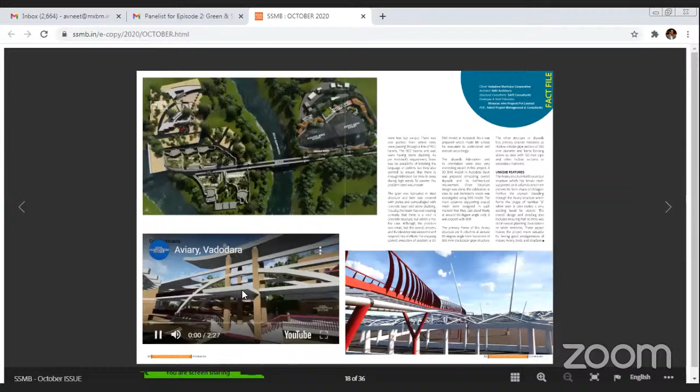Over to you, Mr. Reddy. Thank you, good evening. Thank you for the nice presentation, Dwivedi sir, Mr. Pingley and Mr. Shah. So Dwivedi sir, some of the questions, of course it's routine questions, but people wanted to know: what are the materials, grade of material you have used for the design?

Grade of material, basically in the PEB it was 250 grade material only. And the tubes, basically these are Vierendeel girders, 2.7 meter high. Top and bottom chord is made of same hot rolled steel. And the vertical members used are basically Tata Steel, that grade is 310, and the top and bottom chord is hot rolled, 245.